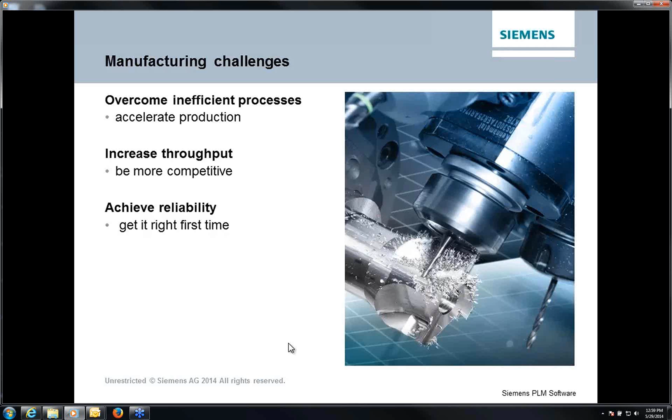The Siemens advantages: a model-driven process that's maximizing the value of a unified system, with innovative technology for greater productivity through automation, and having solution confidence to support your business with a proven system. Now, let's look at the model-driven process with NX. Let's learn about the model-driven process. In NX, we call this the master model.

Master model enables users to have a single model that's used for all downstream processes, from drafting, tool design, and assemblies to NC, CNC programming, and more. Product manufacturing information, PMI, drives automation of the programming of inspection and documentation, along with CAM programming and feature recognition. Workflows are done in parallel and concurrently, thus reducing manufacturing engineering time.

All users and consumers of this information are kept up to date, seeing the latest progress and changes in the work because of the full associativity in NX. There is no need to manage multiple copies of design models or to use separate software for different work tasks. Engineering change orders are seamlessly handled. All documentation and programming is updated from the single driving master model.

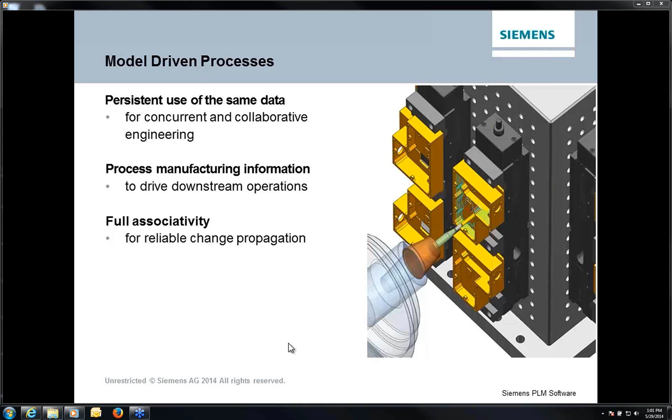This factor alone saves time and money, eliminating issues like the part was programmed to the correct revision but was rejected by inspection because their documentation was a revision behind. Jim Sutton of Minco Tool and Mold stated this about Master Model in NX. He says, Master Model enables a design change to propagate through the tool design into NC programming. It ensures accuracy through the entire assembly, knowing that the finished product is what the customer has ordered.

And this really becomes a powerful statement about the ability to help drive one's business to make sure we have accuracy in everything we're doing, from part pieces, design, and models, to the accuracy of delivering the product that the customer has ordered.

Model preparation and job setup in NX. Here, you can import or design your CAD model. NX reads all common CAD formats. We're going to select the CATIA V5 format. It's just a Windows file open, and here we'll see as we convert and load the part directly into NX,

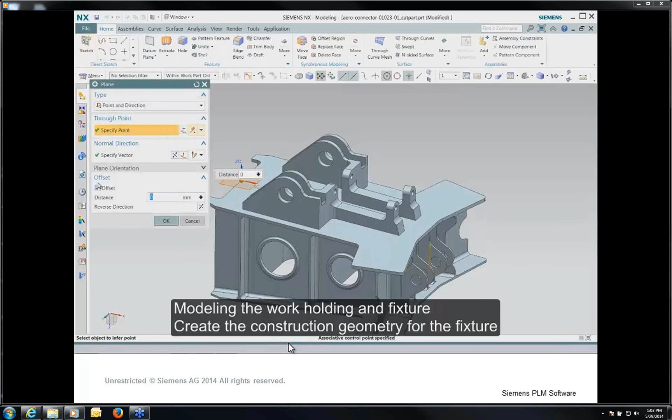seeing the CATIA model. From here we're going to create a sketch plane and model the work holding and fixtures, creating the construction geometry that's used to build that fixture. We'll start with just a simple rectangle defining the outside border or the footprint or pad for the fixture. Again, with constraints and dimensions you can size and shape the geometry as necessary.

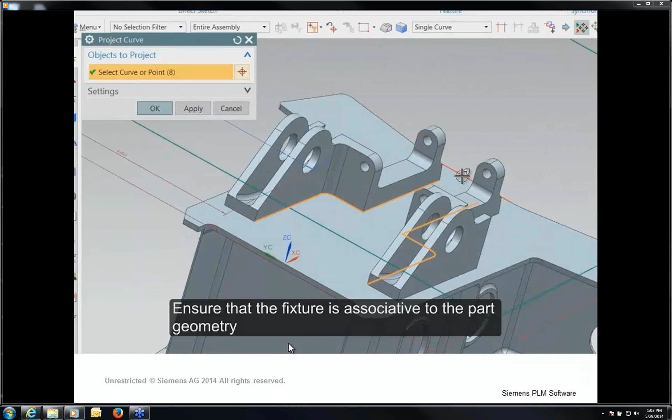Here we're selecting the edges or features of the part that will be used to create the containment boundaries on the fixture. This ensures that the fixture will always be associative to the part geometry. You can create fully defined sketches using the CAD tools in NX, as here we're adding additional geometry defining our design. You can create geometric rules that also assist in your design. Here we'll make all these lines parallel to the other sides of the fixture.

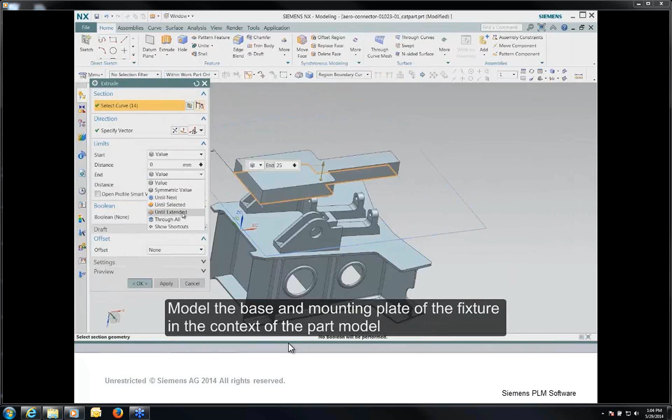Modeling the base and the mounting plate of the fixture is simple. It's just in the context of the part. We just select the part, and we'll select Extrude, and we'll just pick a face onto the part. This would be the mating face where the fixture would align to the part. We'll then select the top area, creating the mounting plate for the part.

From here you could go ahead and add other fixture components to the part. Like here we'll add a bolt that will be used in our finished assembly fixture or our inspection fixture. Again, you can add additional clamps and fixtures using assemblies and components.

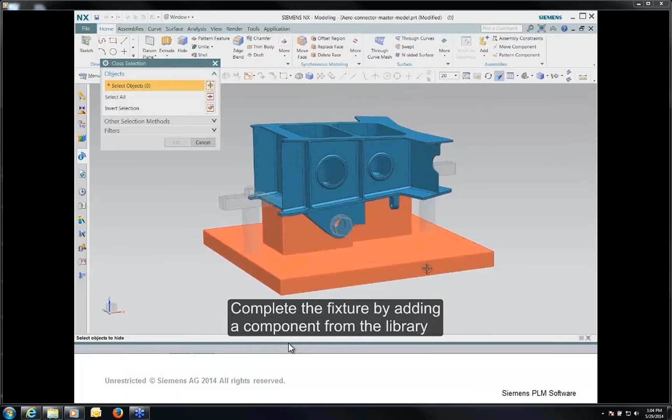So here we'll turn these off, and we'll continue on with our design using synchronous modeling to create the stock model for the manufacture of this part. Here we'll select the entire part and close all of the hole openings on the part. Again, we'll then offset different regions and boundaries of the part, representing what the casting stock would be from an investment cast part. Here we'll see a synchronous model can directly edit all the imported CAD model data.

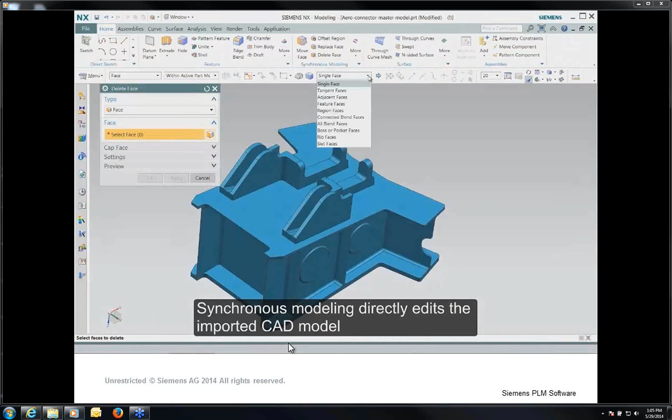We'll add stock to the boss areas, change the blend radiuses on the part, and remove some of the other features or defeature the part. Add draft angles, etc., and continue modeling the stock model of the part.

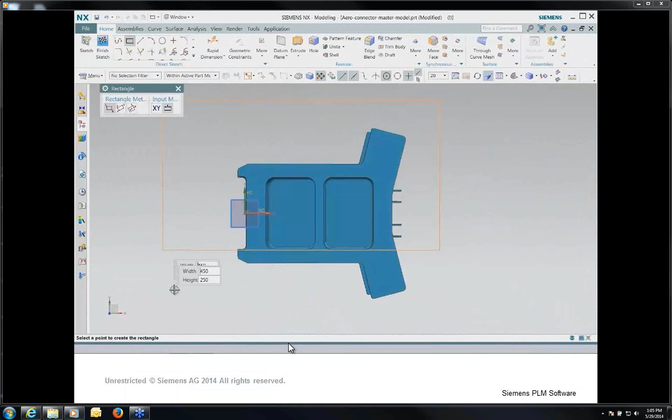Here we continue modeling the second fixture for the part. Again, a similar operation as the first, we'll just create our sketch for a part, defining the areas of the fixture we need to create. We'll select the edges of the geometry again to remain associative. There we select the geometry. You can see the ease of modeling inside of NX to create the fixture.

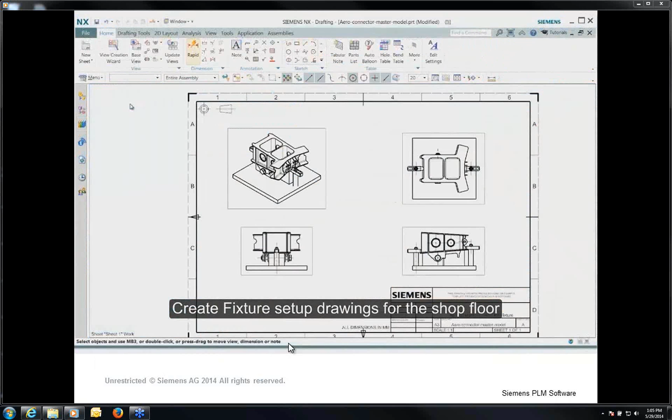Here we will move some of the clamp components. You can again see the ease of the dynamic repositioning of components in NX. From there we will create the fixture setup drawings for the shop floor. Again, this becomes vitally important when jobs are created, to have this kind of documentation quickly, easily, and readily available associated to the part.

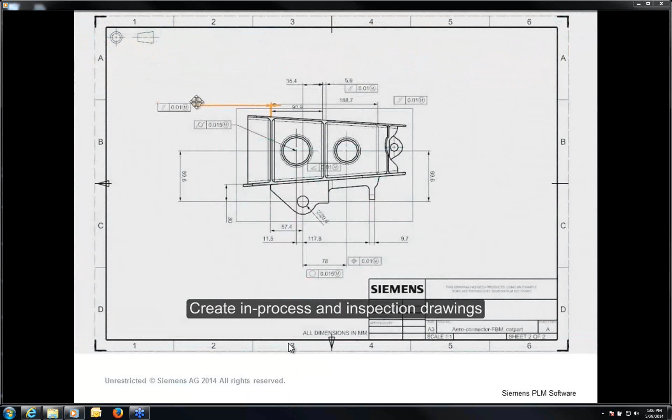Preparing product manufacturing information with PMI, again, is easy just by attaching the geometry the same as you would in any sketches or dimensioning onto the part and creating the drawing, thus defining the product manufacturing information and feature control frames. Here we see the finished drawing being created for the inspection operations.

There we move into and you see a finished job preparation has been completed. In design model, 2 fixtures, 2 stock models, in-process drawings, inspection drawings, etc. Accelerate your production with NX.

We have just seen how NX is used to increase your manufacturing engineering throughput in the job setup and preparation tasks we all commonly use. Having the ability to create associative stage models and stock and casting models from customer-supplied design data ensures reliability and the confidence that you always have it right.

The inspection and quality department preparation and the fixture needs were handled, and the process documentation and drawings produced all concurrently from the one driving design source, enabling accuracy and communications throughout the entire job cycle. Let me tell you more about the master model workflow.

Let's move to the CAM and CMM programming tasks. Here the work that was done in the job prep and setup is used by the programmer and programming departments to apply the tool paths and our inspection paths. I'll show you this next. Programming the setups and operations in NX.

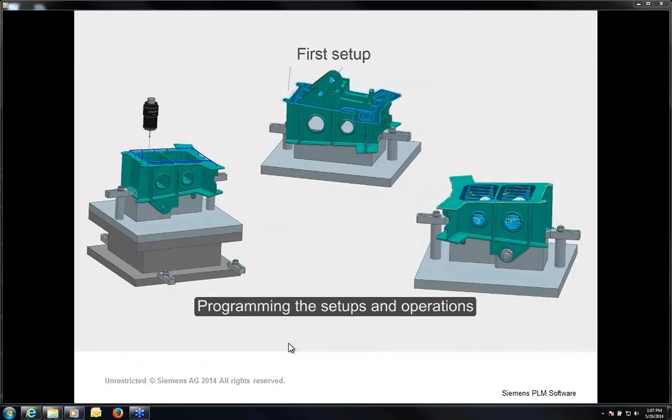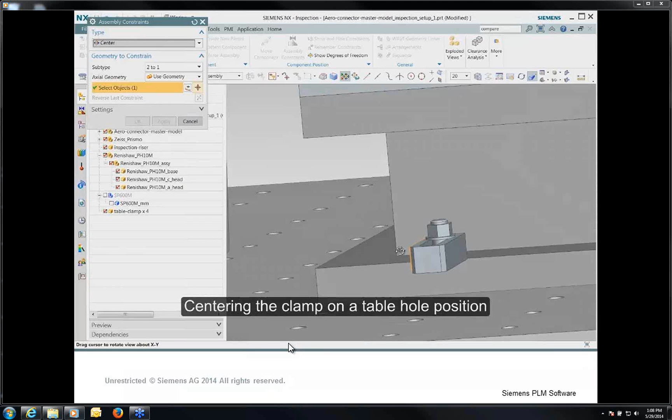Adding the part and the fixture to the CMM from our previous model preparation is fast and easy. Simply open the part, and add it to the machine tool. Dynamically adjust the fixture components. Here we will align the clamp to the mounting holes on our CMM. You may use constraints to center this clamp on the table's hole position just by selecting the edges of the clamp and a hole position.

Using the PMI automation begins by linking the PMI on the model to the part. We select the SP600M probe, and we automatically have recognized the features, the measurement dimensions, and locations for the part. The inspection paths are also seen in the inspection navigator.

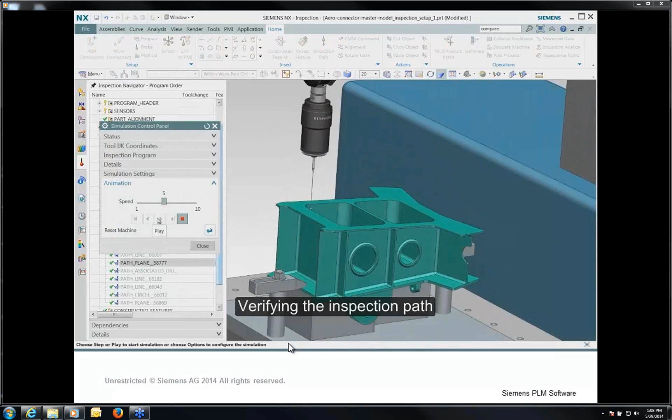We verify the inspection paths of our part with simulation, and to modify a path, we simply double-click to change any of the settings. Here we'll look at the point set and change them from 8 points to a 6x6 grid. Fast and easy programming with NX CMM.

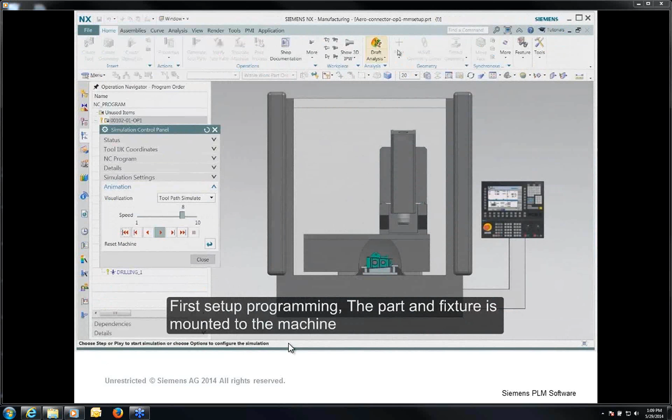Let's look at what the CNC programming department has been doing while we were over in inspection. First setup programming, the part and the fixture are mounted to the machine. NX CAM machine simulation verifies the programming and the material removal. Here we see NX CAM simulation verifying our 2.5D volume-based milling.

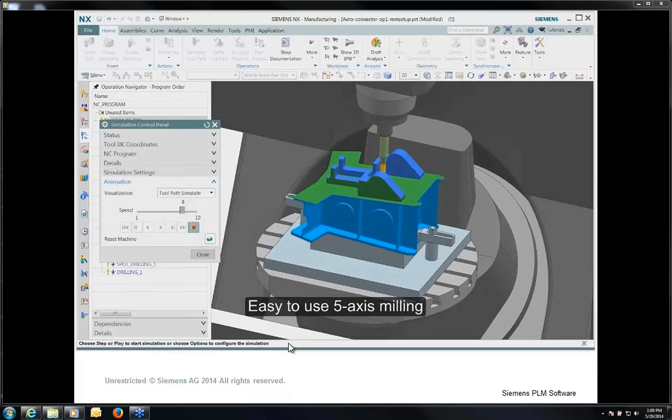We continue on with additional program features with easy-to-use 5-axis milling contouring around the bosses of our part. We then go in and look at swarf milling in 5-axis of the boss lugs on the part. We'll continue with additional operations with 3+2 milling and multi-axis support by finish profiling the rest of our part contours, thus completing the first setup of this side of the part.

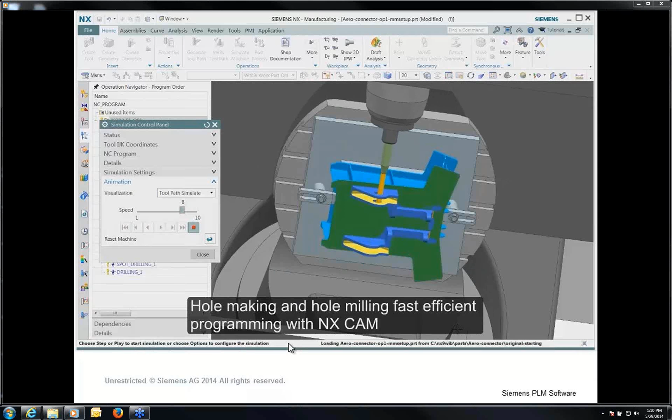Additional hole milling is fast and efficient in programming inside of NX-CAM.

Next, we'll look at the second setup. Programming begins here with face milling in the second operation. Cut and rapid traverse across voids are all program options inside of NX-CAM's toolpath. Material removal and verification is standard in NX. Pocket floor cleanup and helical Z-level wall machining is shown here.

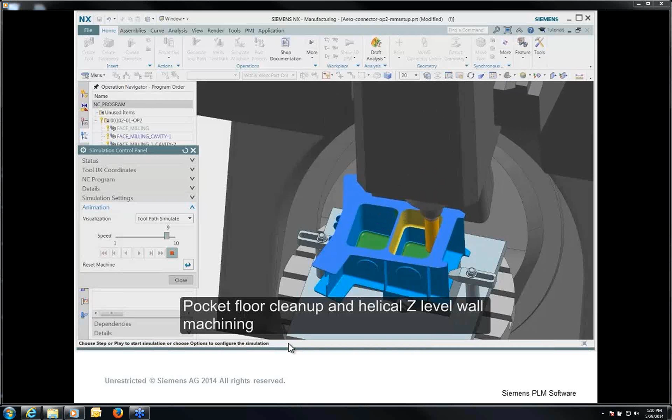Here we'll continue on with that boss, finishing the second boss, and then moving on again to finishing the holes in the second operation of our part.

Rotating and repositioning to do the second one with our spiral helical hole milling. Hole milling continues on the rest of our part to complete it until we do our outside contour with multi-axis contour profiling. Let's look at how post-processing is done in NX.

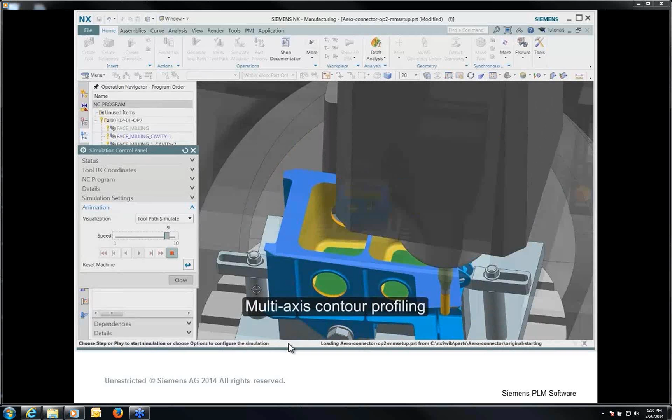Here we select the desired post-processor in the desired control format. Quickly and efficiently, NX creates the posted output.

Let's take a look at how this posted output would next be used in shop documentation. Shop documentation is standard in NX-CAM, and we create HTML formats of each operation and operations sheet. Tooling sheets and operations sheets are also used in shop documentation. Again, a simple click and pick creates this documentation in seconds.

The job is now ready to go to the shop floor.

At this point, the work is ready to enter the shop floor production phase. We have just seen a completed manufacturing, engineering, and programming workflow process. We've seen how NX technology enables faster throughput with automation, intelligent features, and a streamlined interface. All along the way, we use the resources of tooling, fixture, machining, post-processor, and simulation libraries in NX.

It is with this capability that NX captures and reuses your manufacturing knowledge and practices to drive your production with consistency of output and reliability that's right the first time.

Here we'll use NX to simulate what will occur on the shop floor in this demonstration.

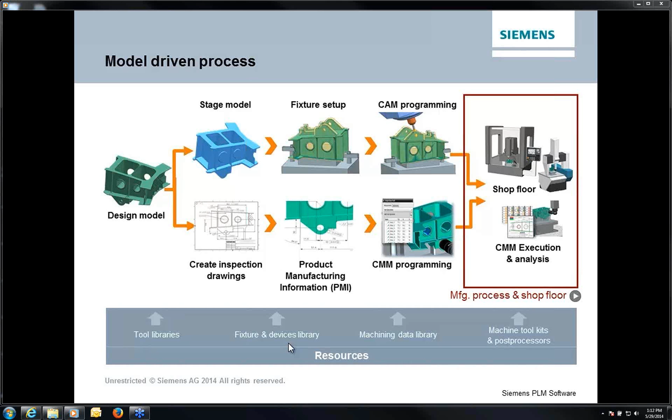The part has been machined. Now it's time for the first article inspection process to begin. Let's look at what the CMM programmer had completed while we were in the CNC department. You can see the inspection paths now have been selected and are completed.

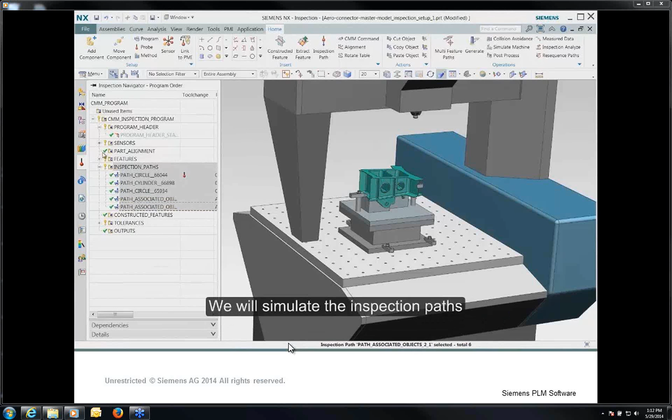Any modifications made, we'll now go back and simulate what is happening on the shop floor inside of NX CMM. So here we'll see the inspection paths come down, do the locations for our holes on the side of our part, and then we'll be probing our rib and pocket locations. Again, you can see safe repositioning of the probe to measure the rib locations and thickness.

The manufactured part is now complete. It passed inspection. You're in production now. All completed manufacturing cycles were done using NX.

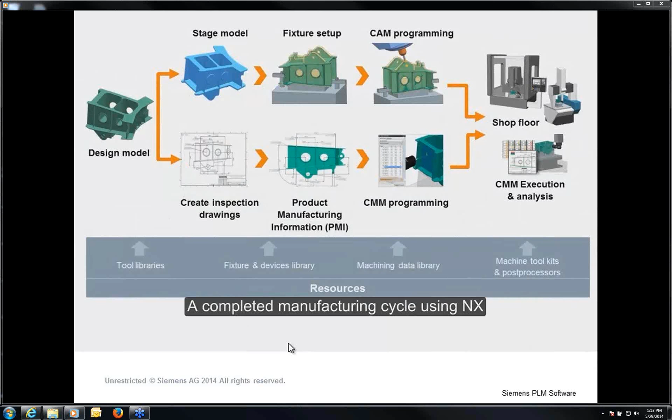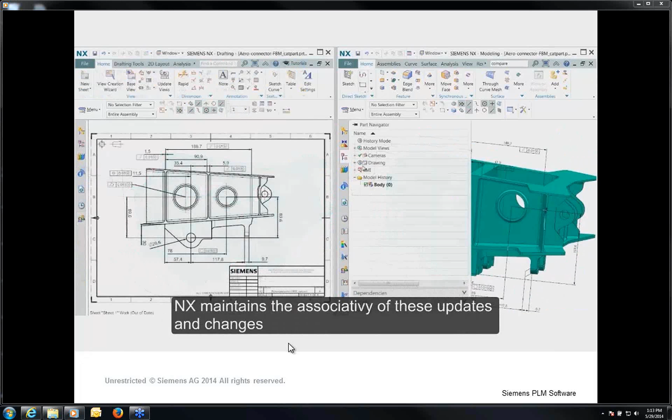It's simple, it's fast. We'll take a look at what has changed. We'll look at the hole locations, the rib locations, thickness, and corner blends, all of which have changed. NX maintains the associativity of these updates and has updated all the documentation drawings and inspection drawings. The drawings you see have reflected all of these changes.

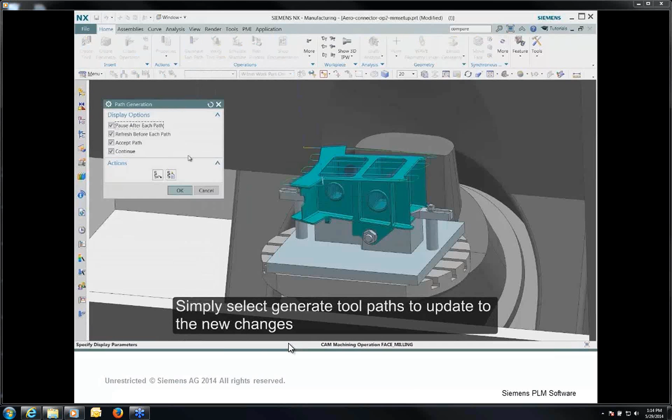Next, we'll review the impact the ECO has on the CNC programs. As you can see, we opened the part, and the part files in the Navigator have been marked invalid. They need to be updated. Changes to the toolpath were marked. We select Generate, and the new processes are simply updated and used for your verification with simulation to approve those changes.

We'll continue on looking at all these changes that are going on with our part. Next, the user will select and view the toolpaths of each operation he would like to review.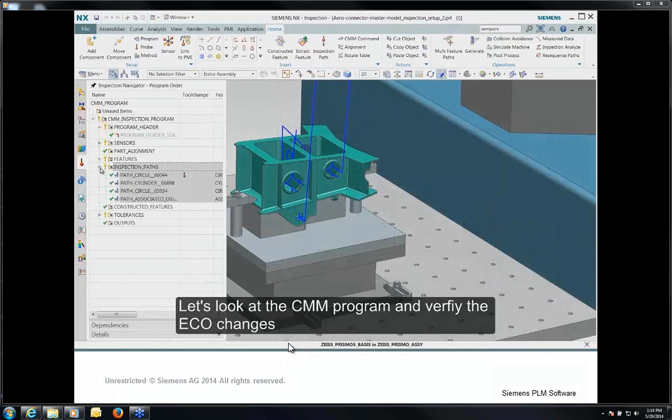We'll now look at what happened to the CMM program and verify those ECO changes. Again, we see the model has changed and the inspection paths. We go back, use simulation to verify that, to have the confidence in knowing it was right the first time. Again, we will go back. You'll see the pocket and the rib locations have moved along with the thickness.

Fast, efficient ECO handling with NX Manufacturing Solutions.

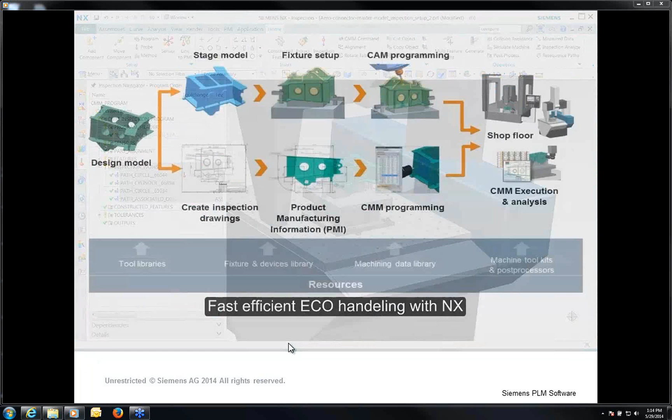The Siemens Advantages. We have just seen the advantages of the model-driven process and how NX can decrease your time spent in manufacturing, engineering, and programming departments, bringing consistency and confidence with your manufacturing workflow and processes. Next, we'll look at NX CAM's innovative technology in toolpath and job programming. We will see how productivity is increased through NX automation.

Innovative technology: the toolpath is created with optimum tooling and cutting strategies to reduce programming time by eliminating lengthy geometry selection and preparations necessary in many CAM systems. Productivity is increased with intelligent toolpath generation by NX CAM's knowledge-driven tools.

NX CAM's 2.5D volume milling saves programming time with built-in intelligence, resulting in not only programming time reductions, but time-saving material removal, all while keeping it up to date with the master model to give you even more time-saving power when ECO changes try to slow you down. Let me show you how.

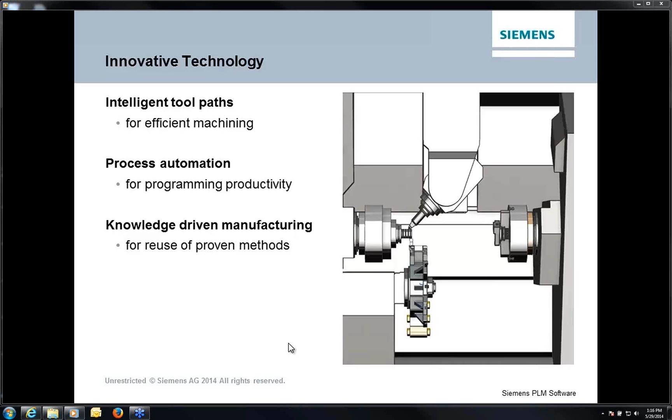Let's take a look at an industry example of the company Telsmith. They're involved in the industrial machinery and heavy equipment marketplace. Their business challenges were to increase their CNC programming output and improve NC machine productivity.

Their results with using NX CAM: more CNC programs were generated in 3.5 months using NX CAM than in the previous 9 months using another system. NX generates more programs in spite of being used to program more complex machines.

What Michael Weir had to say is, we're measuring our savings not in the minutes or hours, but in the number of shifts we save.

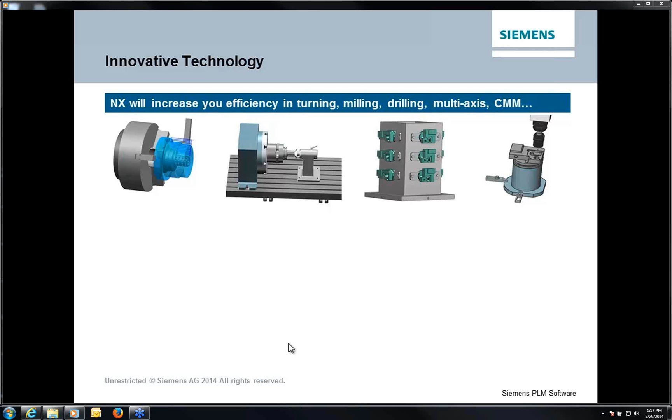NX innovative technology. NX can increase your efficiency in turning, milling, drilling, multi-axis, CMM, documentation, and more. Many products need to be manufactured with multiple setups across multiple machine styles. We've seen how Master Model ensures that we have the correct data all the time. Now let me show you in more detail how NX CAM can drive productivity and time savings in your business.

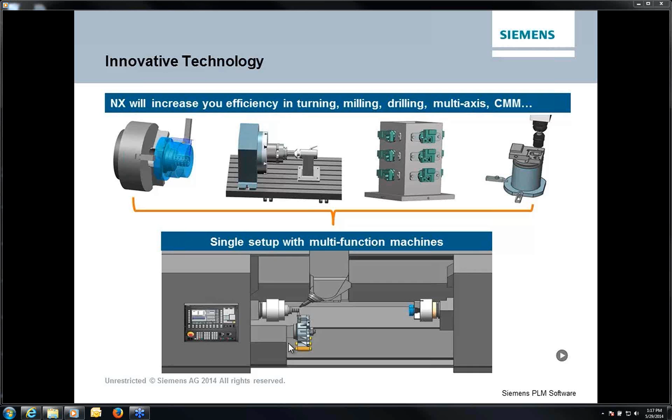Complete programming of a machinery part will be demonstrated here. Here we'll take a look at this filter head part. We will start with the turning setup in NX CAM.

Notice we have a workpiece setup. We define our workpiece, our stock, blank, and fixture components. Along with that, we will identify the blank, and we will select the materials from the material library that this part will be manufactured from.

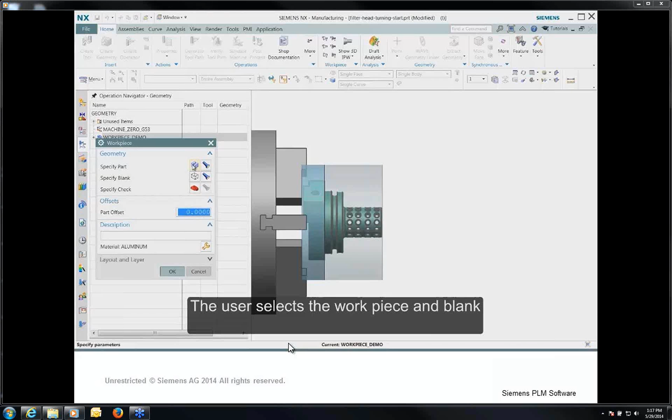Here we'll select aluminum for our part. From there, we will go back. NX automatically creates the spun outline for the lathe cross-sections that's used for programming. There we can see them outlined for us.

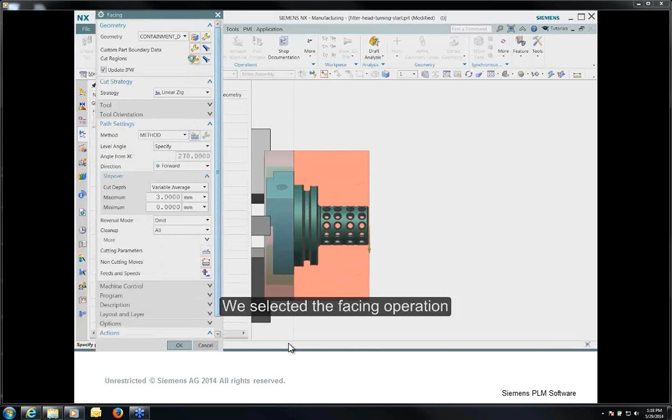Next, we'll look and see how to create toolpath operations in NX. So we can select. Here we'll take a look and use the facing operation for our part. We'll select our part, and it's as simple as just selecting the cut region or the cut face we wish to use. Again, we can grab the tool, dynamically zoom in, take a look at that, and simply press Generate.

At that point, we understand the volume and size of the stock. We created the facing operation. We'll create our second operation for roughing. Simply press Generate. We understand where the stock volumes are. No additional picking necessary. Here we'll see 3D material removal and toolpath verification of the two toolpaths we have just programmed.

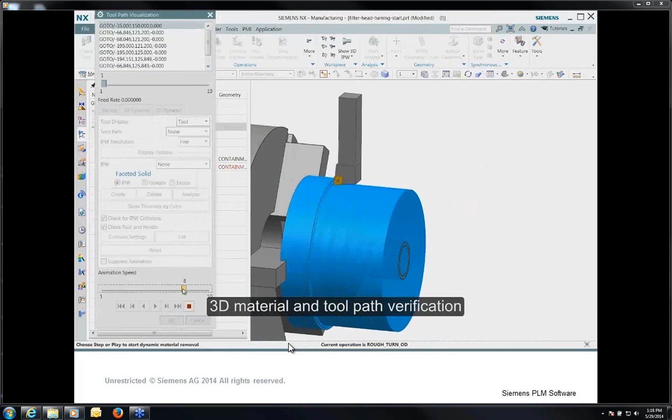We will continue on programming our part with the rest of our features: grooving, finish operations, etc. Here we'll take a look at what the programmer has done with that.

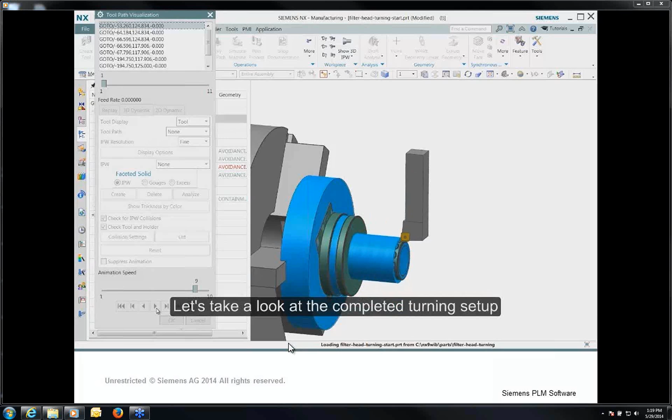We'll replay this again with verification with material removal. We see our facing operation, our OD operations, followed by our finish pass, grooving cycles to complete our part, along with the boring or drilling of the large hole in the center of the part.

Second machine setup is drilling, if this part was done in a conventional manner across 3 different machine tools. NX setup assures reliability with machining by the use of assemblies. Here we use feature-based machining to automatically program the holes of the part.

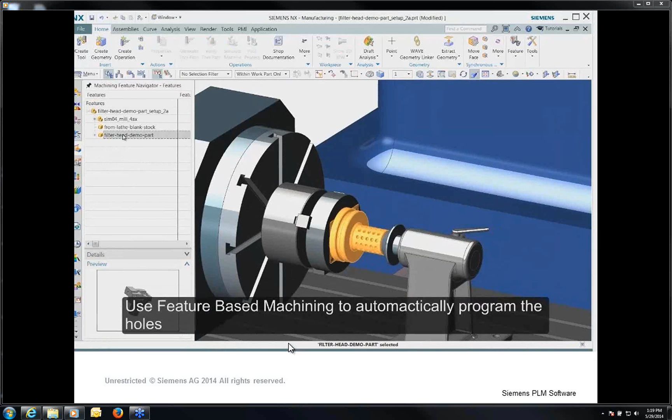Feature-based simply select the part and select the desired type of features we are looking for. You may filter them just separately or find all features on the part. Here we will unselect grooves and we will just select the hole operations on the part in this demonstration.

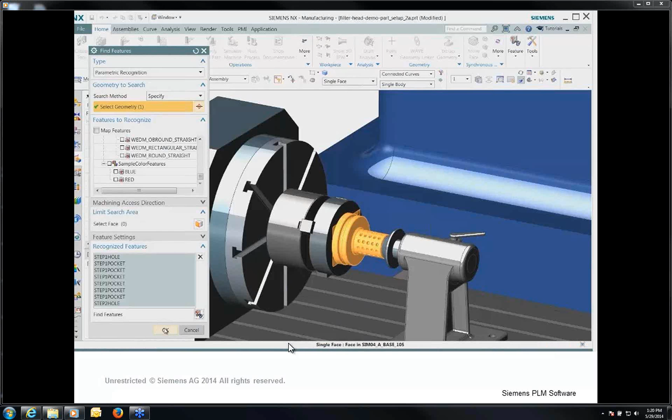So with this, it's simple. We select the option for holes, and we ask it to find the holes. We see NX is finding the features, locating them, and there we see that we have found over 60 features, or hole features, in our part.

It is quick and easy to just select these features to have them automatically programmed with the appropriate tool size and operations for that feature type. Here we would have our drilling operations, our spot drill operations, center drill, chamfering, and our tapping operations.

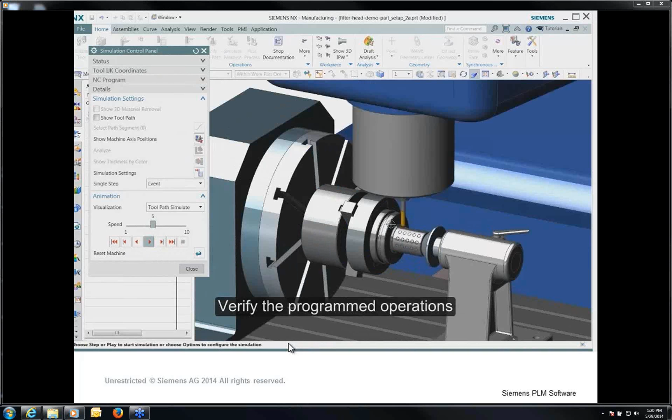Let's go ahead and take a look at the verification of these program operations. With this, we'll simulate the part, we'll zoom in, and we can see where our first position for our hole location will be. Then we will just select play to watch our program operations be simulated as they would be machined on the actual machine tool.

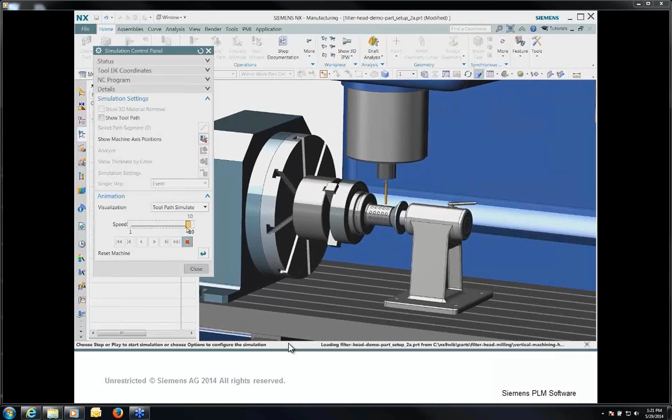We'll continue from spotting and on to finish drilling in our operation, thus completing the second setup for this part path. We would continue on moving into our third setup, which involves the finish machining operations on the head of the part. Here we're using horizontal machining with our multi-part programming. 2.5D volume-based milling keeps track of all the in-process stock across multiple machined parts.

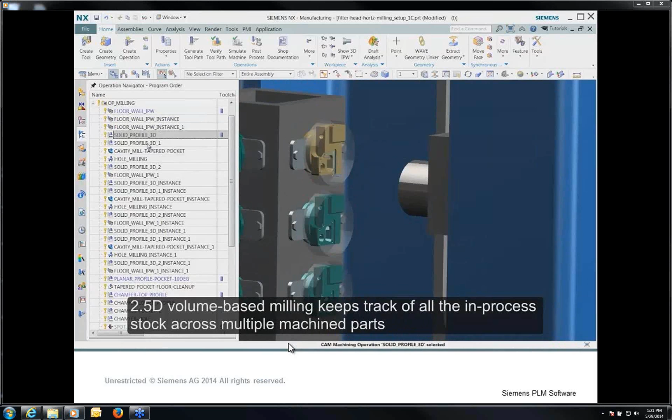With NX, it is only necessary to machine or program one part, and all the other parts, regardless of orientation, are simultaneously or automatically machined. To make a change is quick and easy - just select the operation, double-click, and make the selected changes. Multi-part programming is standard in NX CAM. This would complete our standard machining operations of turning, drilling, and milling.

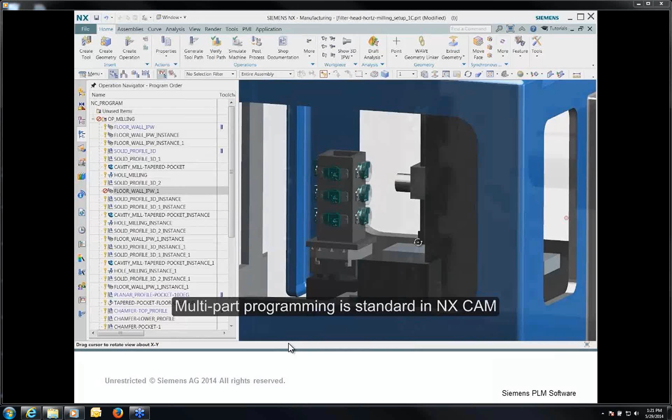Multifunction machines reduce setups and increase productivity. Multifunction programming requires only one setup in NX CAM.

Here we see synchronized toolpath on the main spindle for turning the main body of our part. We continue on with the boring of our part, finish toolpath, and grooving operations.

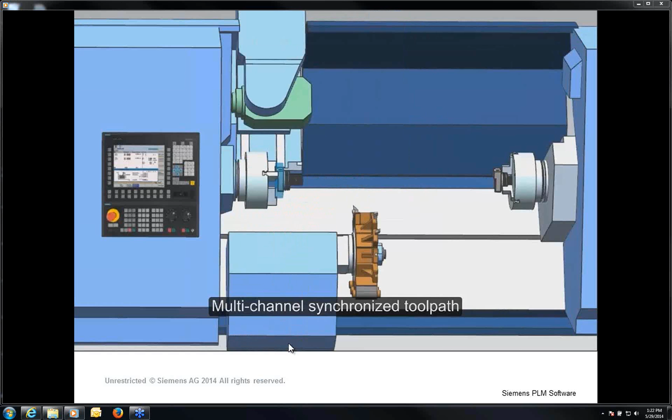We will continue on by drilling on the main spindle and milling operations on the sub-spindle, continually programming on the end of our part, creating the part contours, relief areas, and holes on the head of the part, while we're still drilling 60 holes on the main spindle, thus saving valuable program and machine time across multiple machines.

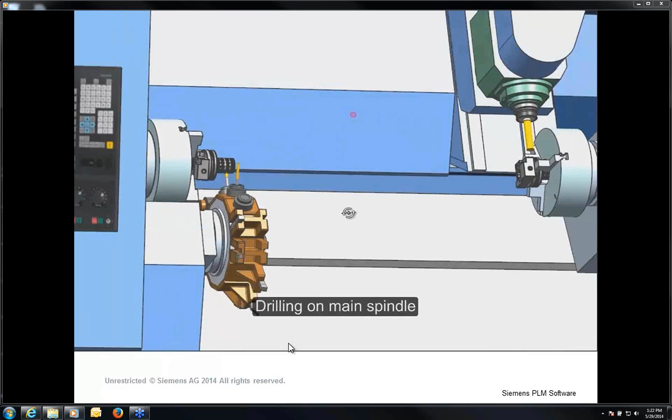Here again we can see the tool path verification, some chamfer milling operations going on. Now we'll finish the face milling on our part, moving on to do some 5-axis machining inside of the small cavity on the top of our part, all while still drilling our 60 holes.

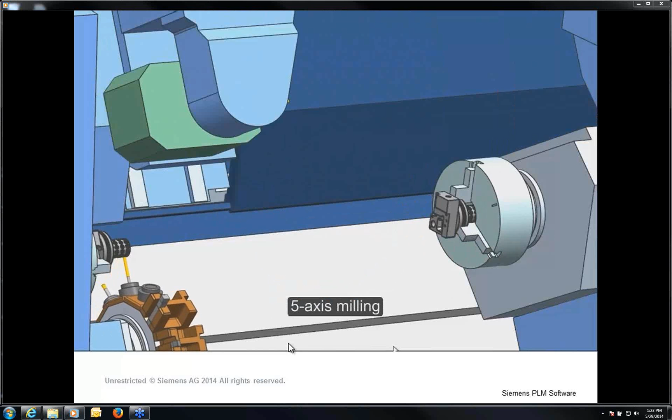5-axis milling, again, is simple and easy in NX CAM. Here we'll see our contour and contour profiling operations in that tapered wall cavity. There we have it, a 5-axis mill turn part, all completed inside of NX CAM multifunction machining.

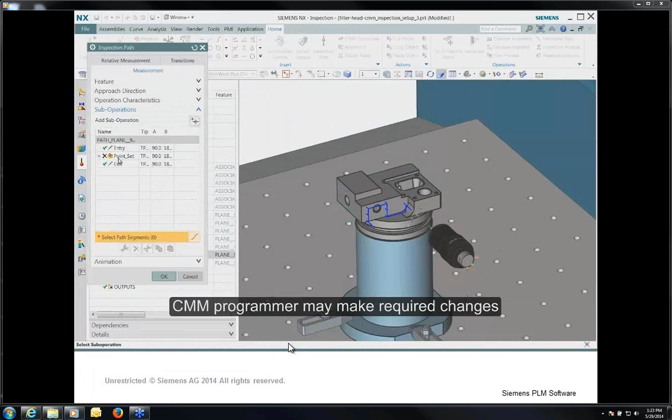After completing the first part, we moved to the finish inspection operation as we had seen before in our aerospace style part. So we see all of our inspection paths that we had selected, utilizing the same features of linking our PMI programming on the part.

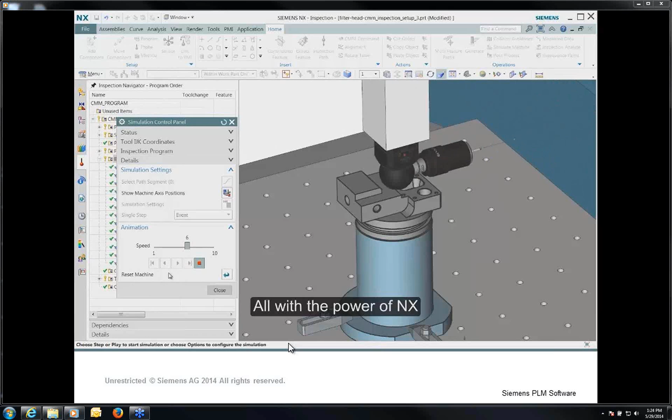The CMM programmer may make some required changes, as we've seen before, changing the size or number of points or contact points that are used. The easy-to-use interface allows quick, rapid changes inside of NX CMM, all with the power of NX milling, drilling, turning operations. Whether standalone machines or multifunction, they're all done fast, efficient, and easily with NX CAM.

The Siemens Advantage: solution confidence.

We have seen master model, NX CAM, NX CMM, shop floor documentation, and all in a concurrent workflow, showing how innovative NX technology can enable your business to grow and be more competitive. Let me show you more detail on how Siemens manufacturing solutions are affordable, right-sized solutions for your business.

There are 3 major components that contribute to the manufacturing reliability and the confidence that you get it right the first time. They are an integrated, associative manufacturing environment that brings it all together, from CAD, CAM, CMM, all the way to the shop floor, and having scalable solutions to match your business needs at affordable costs.

Let us show you how affordable an NX solution is. You can start with a value price package or a point solution for turning, milling, etc., and always have the confidence that you can add the capabilities as you grow and your needs change, all the way to fully managed manufacturing, shop floor, simulation environments, along with the staying power of a major manufacturer, Siemens, an established vendor in the manufacturing marketplace.

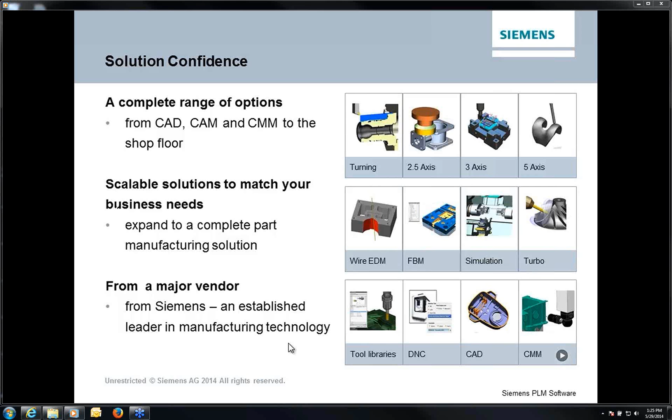Let's look at an example of a larger company that has used all of the Siemens products. Fooke leverages an end-to-end product development solution from Siemens PLM to streamline the development of large complex machines. Their solutions include NX, NX CAM, Teamcenter, and the Siemens 840D controller.

Whether your company is small, medium, or a worldwide manufacturer, Siemens Manufacturing Solutions is right-sized for your business and your future. Let's watch and listen to what one of our mold and tool companies have to say with their success with NX.

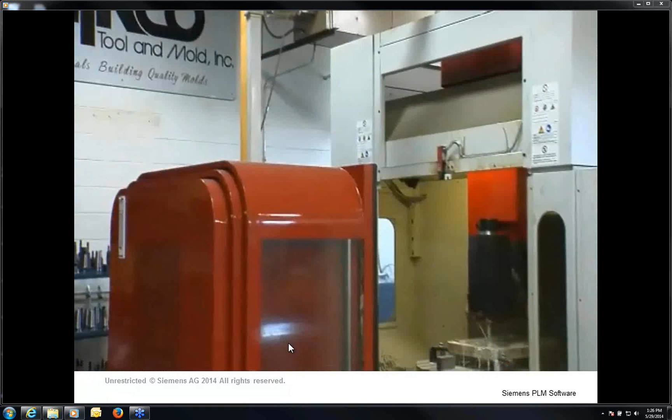Benco Tool and Mold's primary business is building plastic injection molds. We've been in business for over 50 years. Our competition isn't the company down the street. Our competition is the world marketplace.

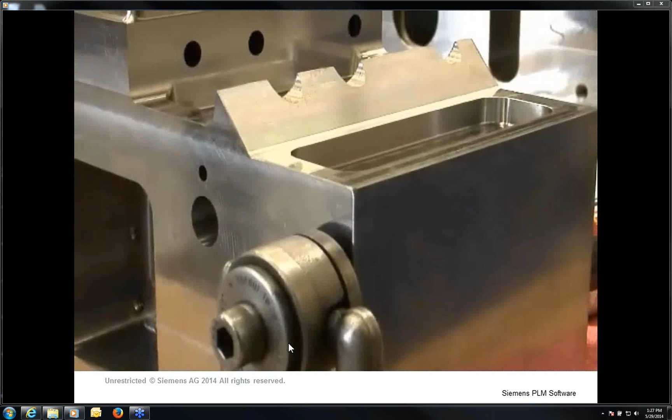We were an early entrant into CAD/CAM, where we found a niche in the marketplace, whether it be just general machining or the mold making part of our business. It is complex shapes. We always pride ourselves in the quality of the tool that we take to press. We use NX to maintain that quality.

A customer comes in with a concept sketch that he wants to manufacture, he wants us to mold. We're able to take that napkin sketch, turn it into real product using NX. NX gives us the tools to engineer our designs up front, whether it be a product design or a tool design. We want to make sure that we go through all aspects of the part and the tool early on in the process.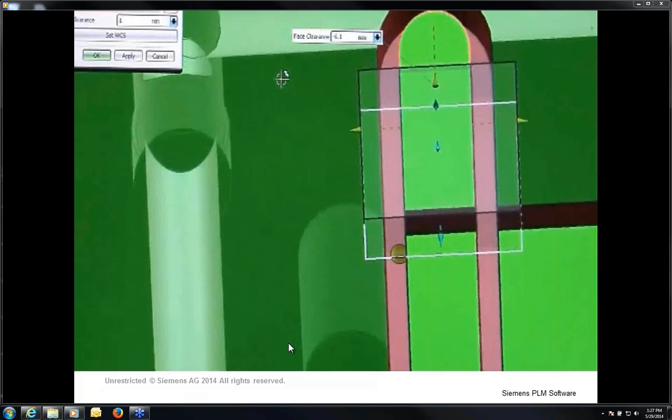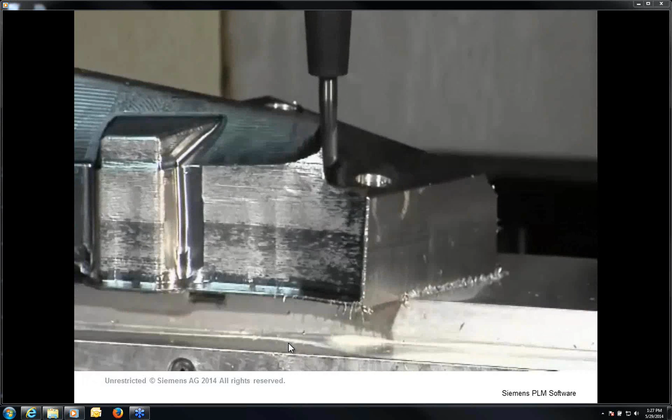By doing that, we know that when we start cutting chips that we're actually cutting what we want, or not duplicating efforts. So it's important for us to maintain that accuracy through the entire process, and that's what NX gives us. We get a supplied file from a customer, and we'll take it in here and we'll redraft it and make it toolable.

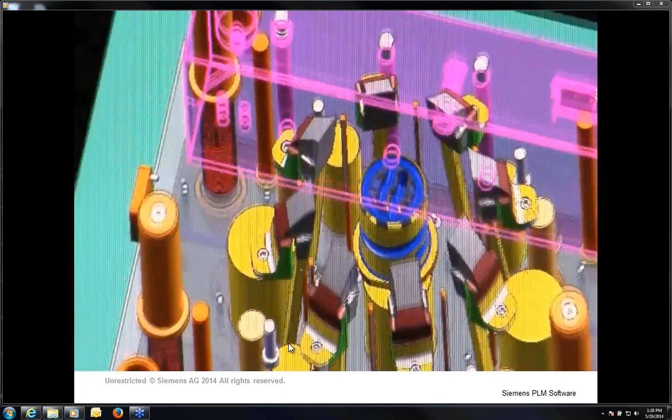Basically, I will wrap steel around that part and make the mold base that will produce the plastic part. NX is a strong modeler where we can bring in data from multiple sources. The ability to manipulate complex geometry is easier to do inside of NX because of its ability to deal with explicit models, hybrid models, or fully featured models. We're not limited by the software in order to develop our product.

Synchronous technology helps in the way you can manipulate geometry easily. You can go in there and remove faces, delete faces, simplify bodies quickly. You don't have to worry about parameters. You just go in there and delete or change size.

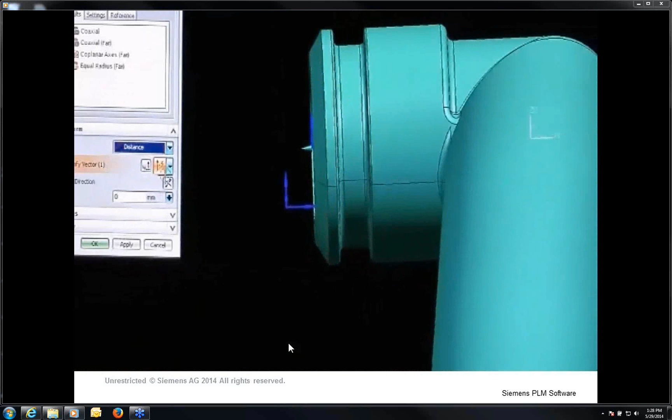That is a Mold Wizard component. We drop that in. It automatically knew to hook into the ejector plates down here. All we did was put the part area on it by wavelinking in the part geometry into the lifter file and then trimming it off. And if we ever update that part, that lifter will update automatically.

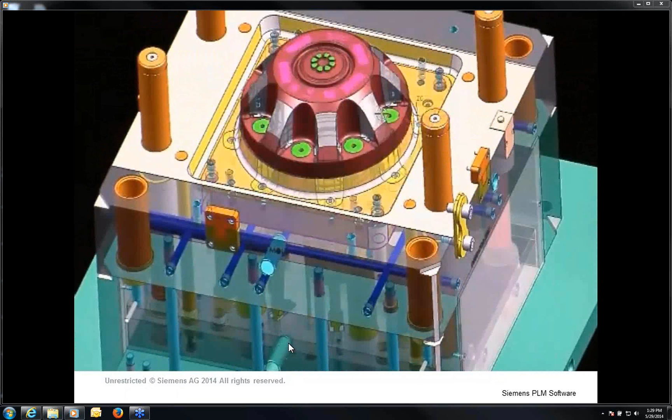We allow that master model then to propagate through the tool design into programming, where tool design will go in, update their model. Programming then will go in and update their data, their tool paths over top of the existing tool data. That's going to ensure that we keep accuracy through the entire assembly, knowing that the finished product we get out of the mold will in fact be what the customer initially sent.

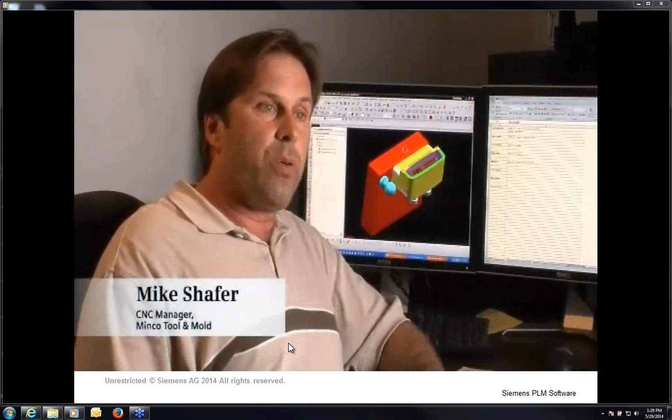We program 100% of the model using the CAM software from NX, and then we do all our electrode modeling, everything through NX, so the finished product. The master model is very important because everybody's on the same part at the same time using the same model. Everybody's looking at the same thing all the time.

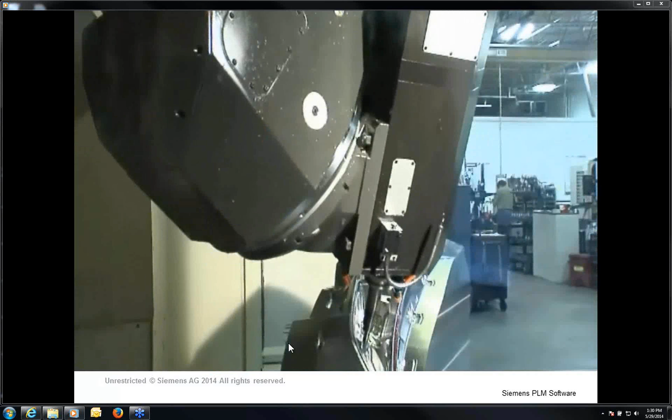Everybody knows how to dimension, verify stuff. You don't have to teach 3 or 4 different software. So if everybody's synchronized on the same software, everybody can help each other. You got to save time, you got to save money. So we implement the high-speed machining whenever possible, small cuts, light cuts at fast feed rates.

And yes, NX has several options that you can adjust your paths accordingly. There's options in NX that will actually turn the corners, which actually creates a much nicer and smoother path. It doesn't have the jerkiness of the machine. It's faster, it's better quality. Now you just set it up and away you go.

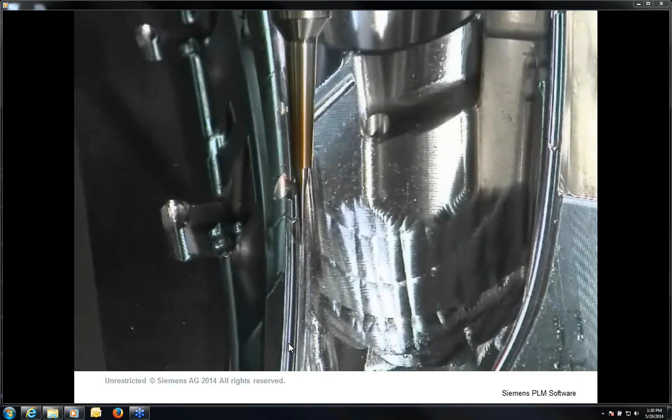Sometimes you may have 12, 14 inches, and now we can cut that in half, which means better rigidity, better part finish, better tool life. Sometimes I'll run 20, 24 hours for a finish cut, but it requires no polish. And you have to have a very good software to do that.

We start in product with NX, we design in NX, we program in NX. So what you see is what you got. I mean, that's just that accurate. It's that good. And without it, we wouldn't be in business. I mean, it's pure and simple. If your guy's not cutting fast, you're not making money.

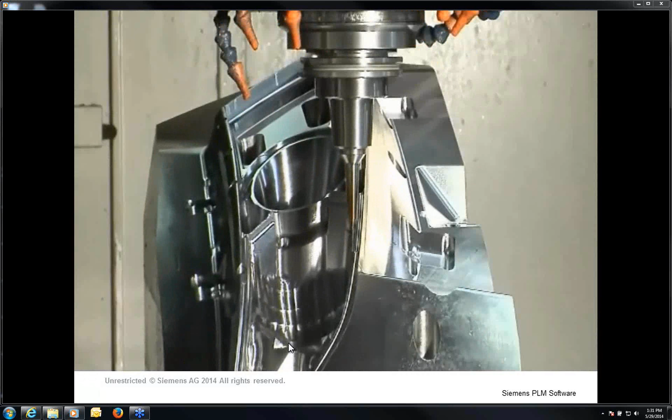If you really want to cut a true part form and cut it accurate, you better have it all today, because the pricing isn't there anymore. It's a world market. It's serious business. NX is an important product to us because it is an integrated product, and that's what we're about. We don't just design the part, we manufacture the part. So it's important to us to take it all the way through in the same software.

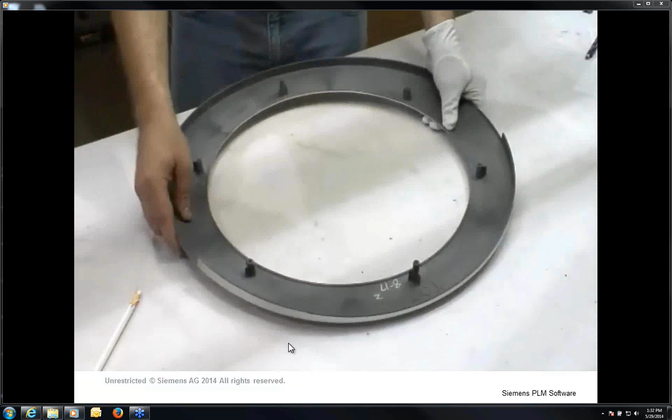If we maintain accuracy both from product design, tool design, programming, through the building of the tool, we're going to ensure that we maintain a level of accuracy that gives us a high-quality part. Time and cost somewhat equate. If you can't beat them on labor cost, then you've got to find a way to beat them in some other way. And that's where we excel and always have excelled, is that not only do we do things in a hurry, but we do it on time.

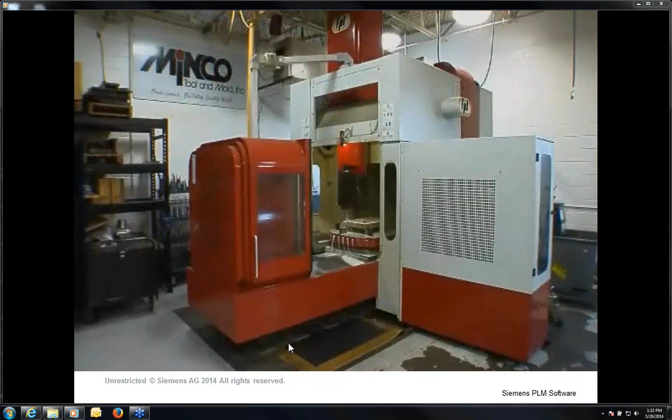Siemens Advantages. Our time is drawn to a close. I'd like to emphasize the advantages your business can have with the Siemens Advantage of the model-driven process to maximize the value of a unified system, innovative technology for greater productivity through automation, and solution confidence to support your business with the proven system and the staying power of Siemens.